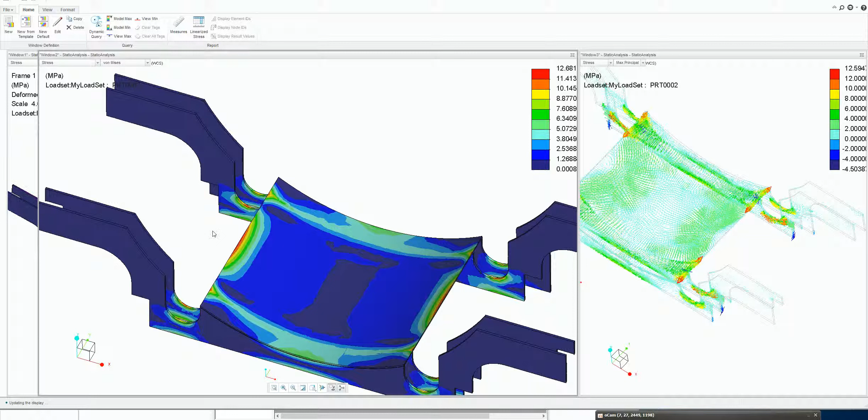Here in this second scenario, which is also the von Mises, we see details of where the higher concentrations of stresses are. So we got, of course, here on these two sides, we don't have any support in between these two members, and that's where the actual tire will rest. So that's somehow expected. We also got some high stresses on these corners around here. So that's somehow the behavior that I would be expecting from this model. So these arcs here also show higher concentration of stress.

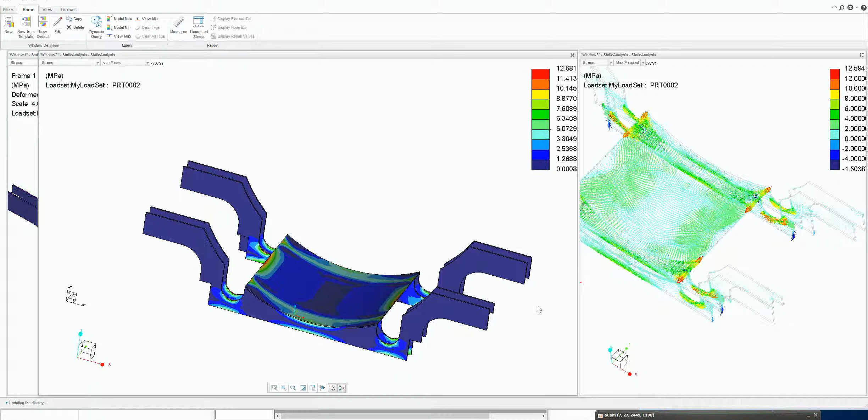In terms of how I built the model, I basically constrained all these edges. They are fully constrained because in real life they will be welded to the square hollow sections. So I didn't leave any degree of freedom on these corners, and also here at the bottom of these members. And of course we have a load in this direction, I call it the minus Z direction, of 1700 newtons, which is assuming a weight for the wheel of 180 kilograms.

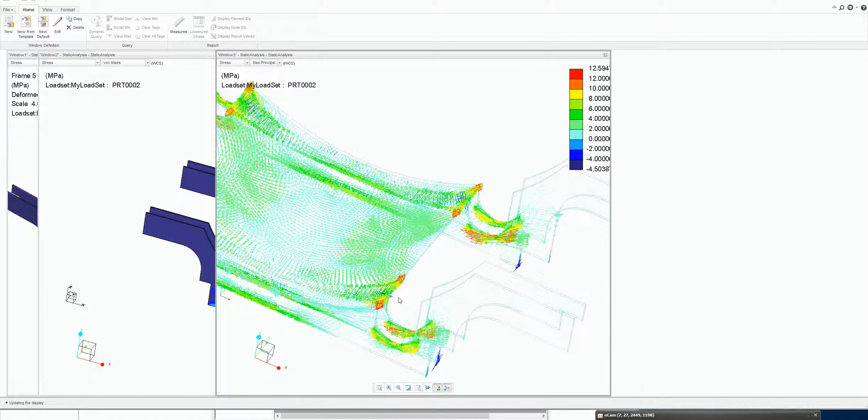Here we have another scenario, which is the stress, but this is the maximum principal, so a little bit different to the von Mises. This actually shows us where the higher concentrations of stress are. So these two areas, although they have higher concentration of stress, it is not as high as what we have in these corners and in the arcs here. So that's what we have here, the maximum principal stress, which is still within the same range as the von Mises analysis.

Now the other analysis we have here is displacement. So if we look here, it's somehow what we would expect, since there are no supports or anything that stops this aluminum sheet from deforming when we place the tire. We have a quite pronounced displacement here. However, the effect of the deformation is actually scaled to a higher percentage. The maximum displacement is only 0.368 millimeters, which is also not very high.

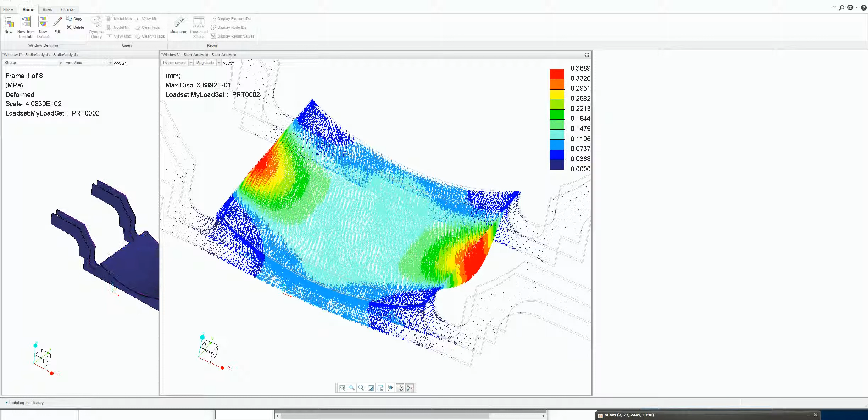So yeah, the color code just shows that there's very low displacement on this area, 0.03 in this blue area, and then we got the green part with 0.20, and then 0.36 for this area, since we have a quite big span here without supports.

Now, some assumptions for this simulation. There are things that can be improved, but they probably need more time to refine the model and get more accurate results. Well, the first assumption was the material. This is an aluminum 2014, but of course, depending on the alloy of the aluminum, the results can slightly change because of different physical properties, density, the Young's modulus, etc. So for this particular case, I used 2014 aluminum.

For this simulation, we actually took the load or the weight of the wheel to be distributed over all these aluminum sheets, but we can actually simulate another scenario where we have a regional load, when all the weight will be concentrated only within this area, within this span. So there will be a more concentrated load, a regional load, instead of a whole surface load.

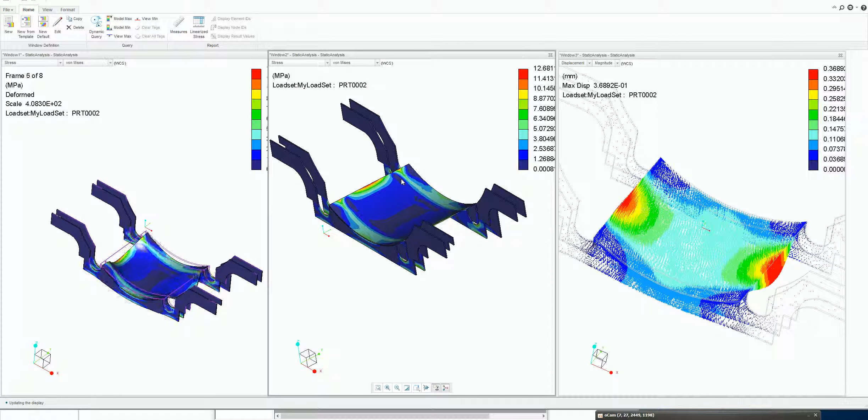So basically, in summary, we got the model here. We put some constraints on the frame, full constraints on the sides, a load of 180 kilograms, and we are getting results on the very low side, almost 13 megapascals versus 300 to 400 megapascals of yield point. So we're very safe. And we were expecting elastic deformation, and that's what we're getting.